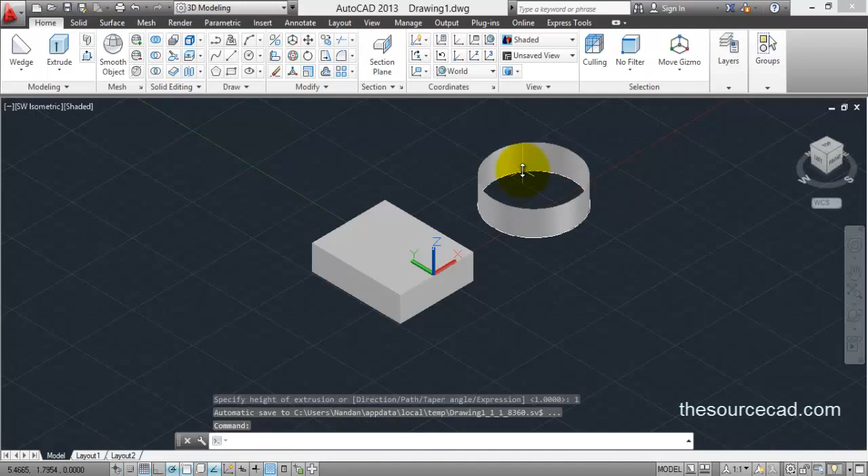Select extrude again, but this time I'll go to mode. Click on mode, and since solid is already selected as default, I'll click on surface and select the circle. Press enter, and now whatever I make will be converted to a surface. I'll enter a height value of 1 unit again and enter. So this one was solid because mode solid was selected, and this one is surface because surface mode is selected in this situation.

Now let's erase these things and go to top view and make one more drawing, something like this, and go to home view. I'll go to this front view, change it to parallel, and now our view.

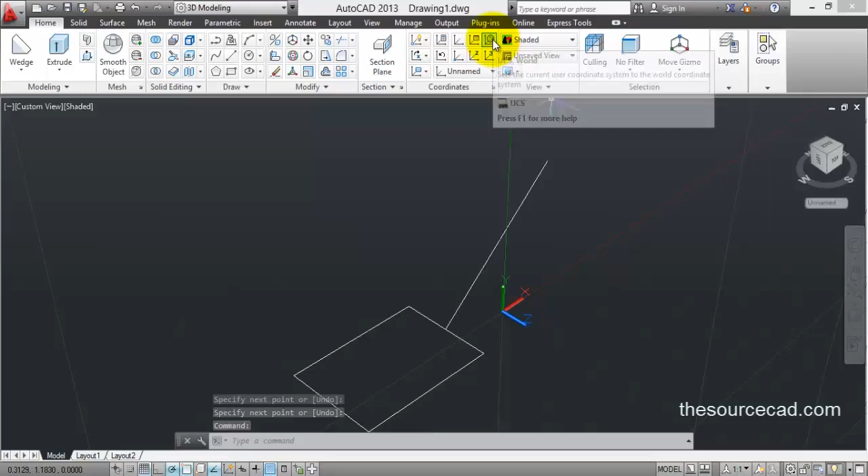Now I'll make a line, something tapered, something like this. Click on this home icon again and go to world coordinate system. Okay, right click and parallel.

Now I will execute this extrude command again. Go to extrude, select this rectangle. One thing I want to make clear before selecting this tool: extrude command can only be executed on closed boundaries. In this case, this boundary is completely closed, hence we are able to execute extrude commands. If the boundary was open, then we would be forced to select each and every object, and in that case it will make a surface instead of a solid.

For example, this one is also a closed boundary and this one is also a closed one, but if we extrude this one, then we have to select all the lines, and after making the selection, when you press enter, you'll be able to extrude it as a surface, not as a solid, even though it is a closed boundary. So make sure that before making this solid, you convert it to a closed boundary by joining all of them or converting them to a region.

Now I'll go to mode and make sure that it is solid. Now click on this rectangle, press enter. Now you can see that it's extruding in the vertical direction, that is along the z-axis.

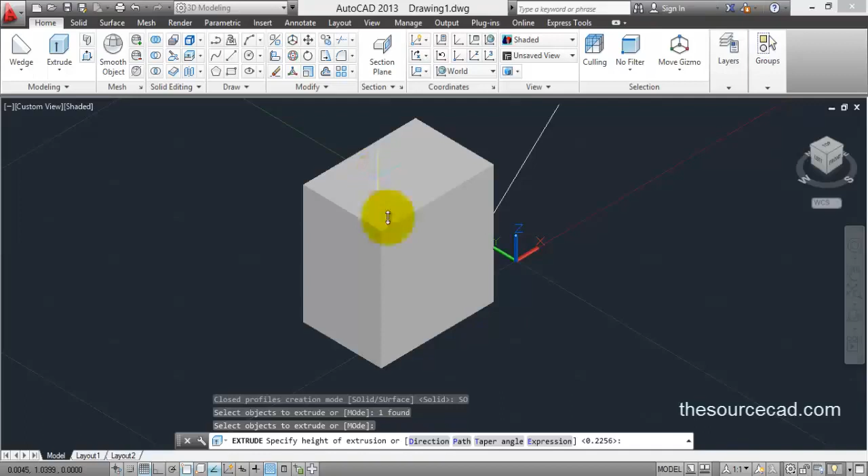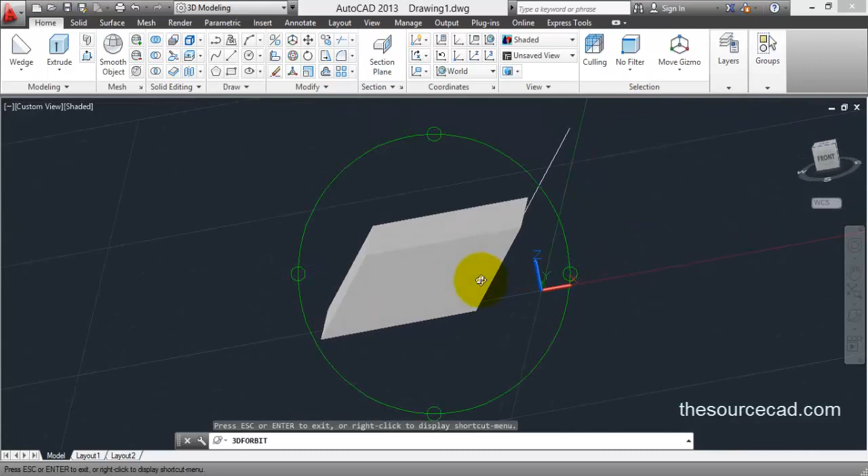If we want to extrude it along some other direction, then we'll select this direction option here. Click on direction, and now I will specify a direction. The start point will be here and the end point will be somewhere on this line. I will select this middle point, and there it is - this one is extruded along the direction of this line, and you can easily set this direction using the 2D rotate command or other 2D options.

Okay, I think you understood this. Now let's select another feature of extrude. Click on extrude, select this rectangle, press enter. Now the path, click on path. Once you click on the path, which in this case is this line, it will extrude something like this. It will extrude up to the entire length of the path, and it will follow its angle as well. So you can see this.

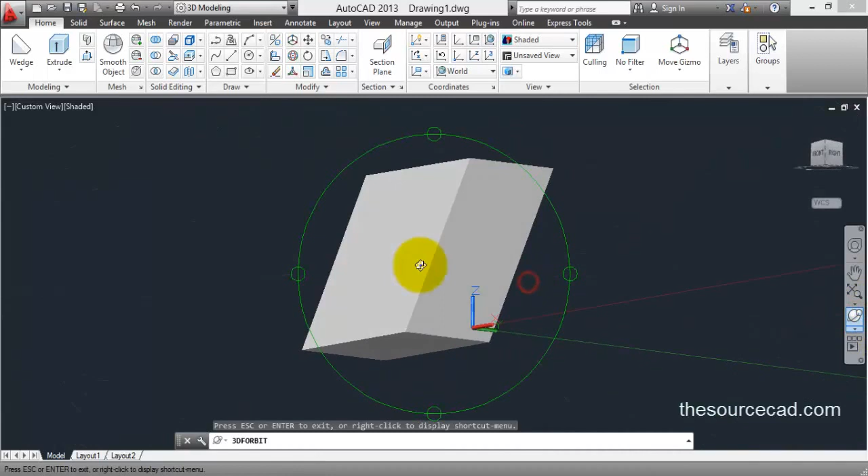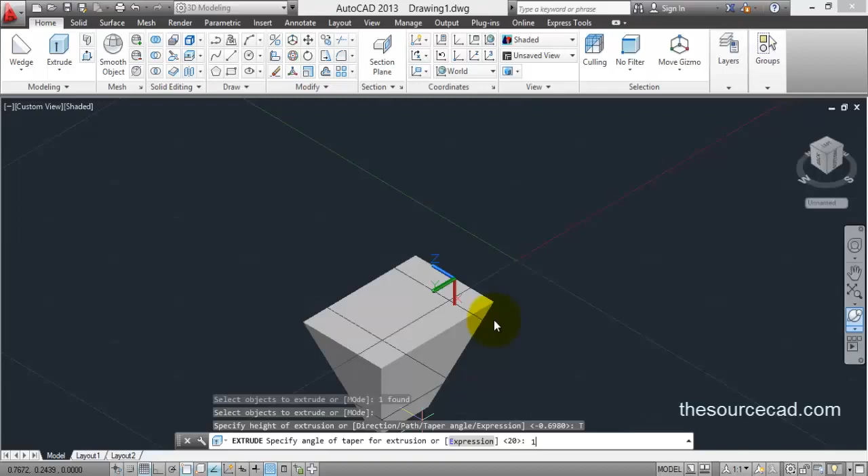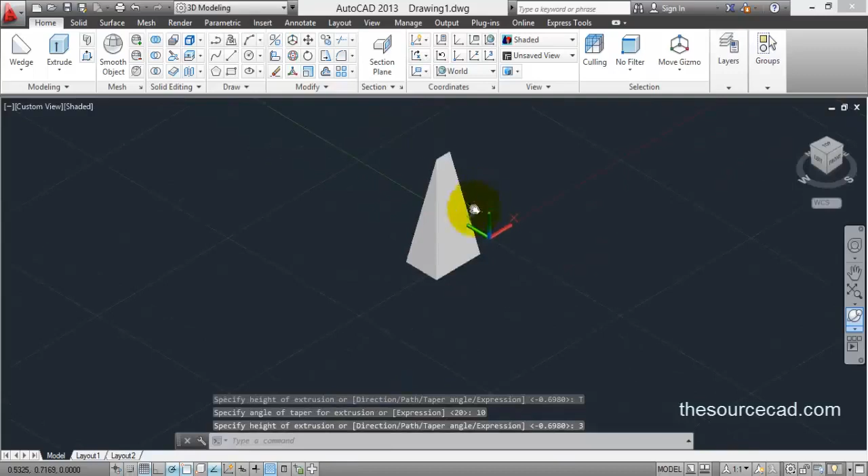Now we have one more option to see. Select extrude, click on this object, press enter. Now the third option, taper angle. Let's execute this thing. Click on taper angle, and this time I'll enter 10 as the taper angle and press enter. Now you can see that as we move our cursor upwards, it will taper, and the angle of tapering is 10 degrees. Either you can move it upwards or downwards, but it will always taper to an angle of 10 degrees. So let's specify a height of 3 units and enter, and there it is. It has tapered to 3 units. This is how you can taper it also.

And this was all in the extrude command. Now we'll look at another command which we have, that is press pull. But for press pull, I'll make a few boundaries, just a few boundaries, something similar to this. Okay, we are done.

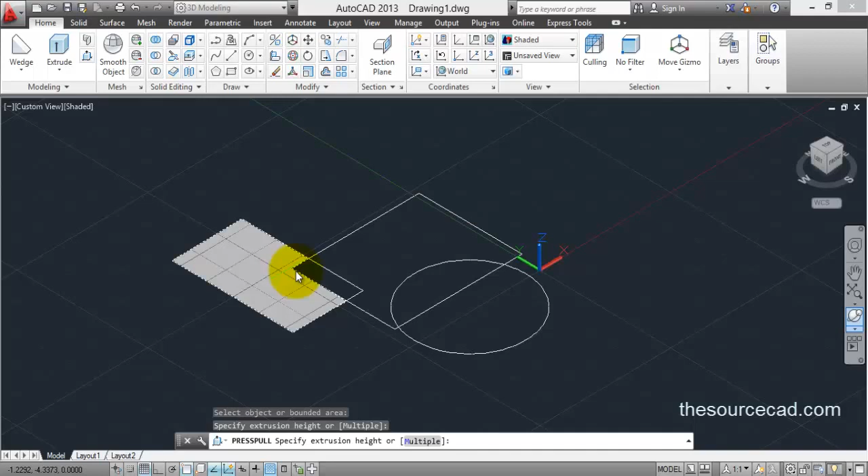Extrude and press pull are quite similar with a slight difference. The difference is, in case of extrude, you can only select the objects, but in case of press pull, you have to select the area inside these objects. So let's click on press pull. Once you click on press pull, you'll be able to select the area inside these boundaries. So click on the area, and then you can see that only the area is selected, and you can do the same operation as in extrude command. So click on 2, enter, and it has been press pulled to a height of 2 units.

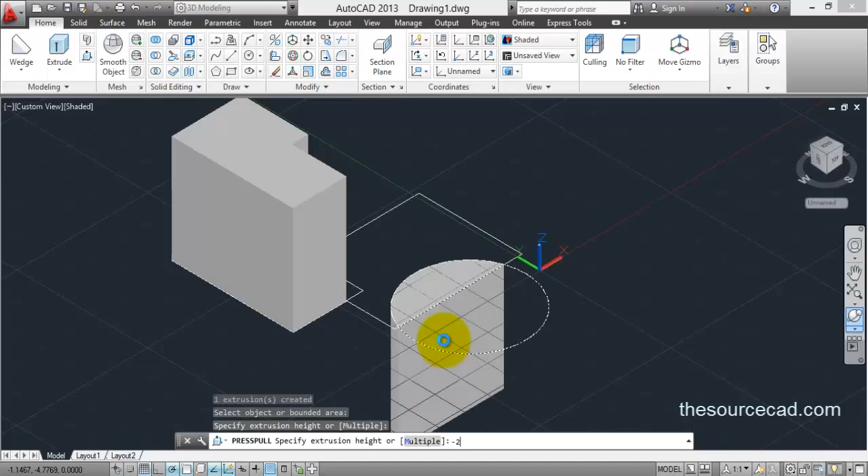Let's select this area and enter a value of -2, and it will go along the negative direction like this. And in this way you can do everything. Click on this and extrude it to the side. We are done. So this is how the press pull operation works.

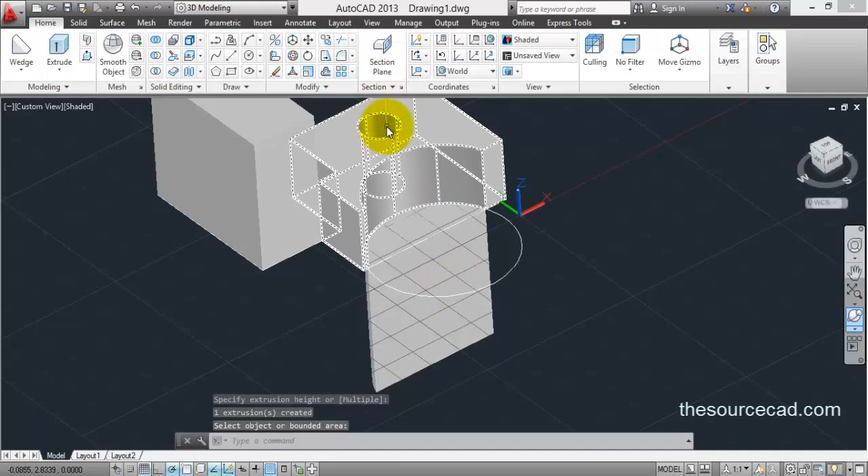Now press pull has got one more use. If we already have an object, then using press pull we can subtract the geometry as well. For example, in this case, let's make an object on this surface. We have made a circle in this case, and I'll select press pull. Click on press pull, click inside the circle and press pull it downwards. Just take it down, no matter what your height is, just take it down and click, and there it is. You can find that it has made a groove. Here a groove has been made instead of extruding it. So if a material is already present, the press pull command will subtract it. So do take care of this.

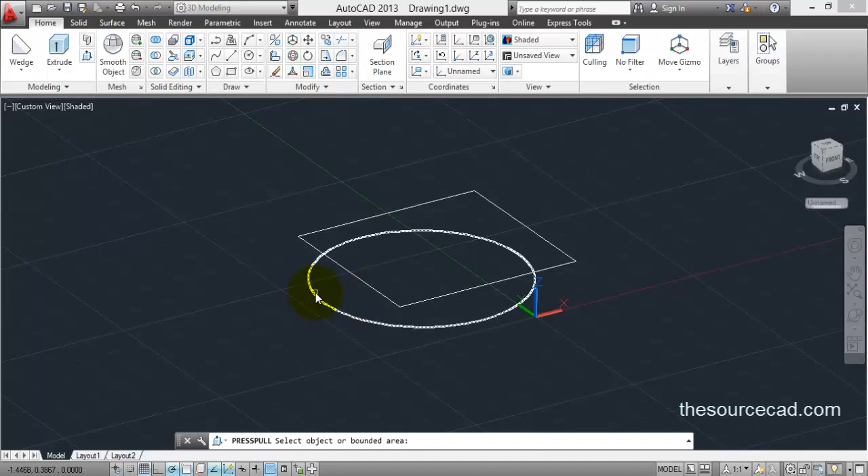Let's erase this thing. You can also select the boundary using the press pull tool. You are not confined to selecting the areas inside. Now go to press pull tool, click on the circle, and the circle will extrude in a normal way as the extrude command, but in this case it will behave completely like the extrude tool. So make sure that you select the area inside. So this was all in extrude and press pull tool.